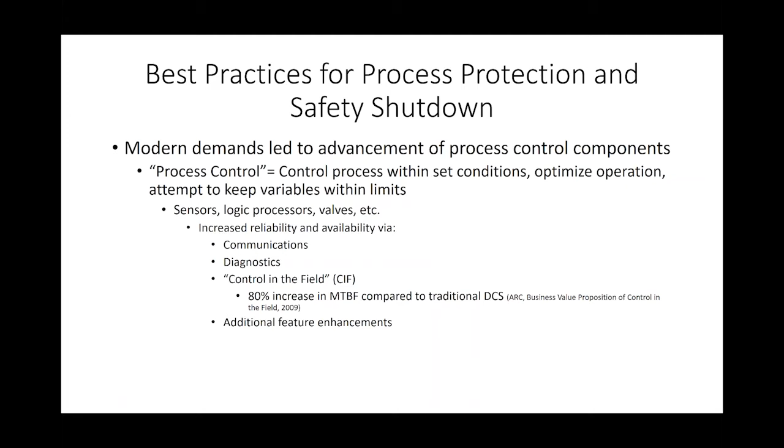But there is another area in your process, and we're going to see, has this incredible technological edge translated over to this area of the plant? It's easy to focus on the process and process control, as it's essentially your cash register. The product is what makes you money. But there is another part of that process, those limits I mentioned.

Process protection and safety shutdown is what I'll call it for the sake of today. And there's basically three areas in protection if you really boil it down. You've got alarms, you've got interlocks and permissives, and if all else fails, you've got your shutdown system. Advancement here has been somewhat limited, and there's a few reasons for this. One I mentioned, the cash register and the focus on process control.

But there's also the appearance or thought that protection systems are separate. It's peripheral. It's over there, not what you're concentrating on. Sometimes it actually is separate, like in the case of safety systems, where it's required to be separate. Speed is critical in this arena. If something goes off the rails, literally or figuratively, speed in responding to protect your assets is crucial.

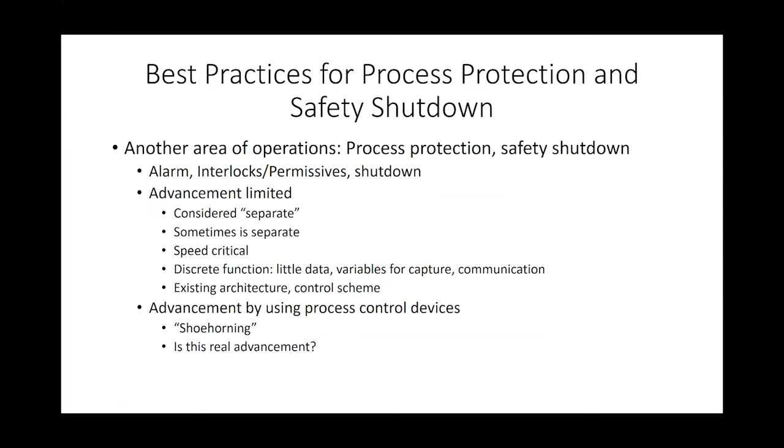Then there's maybe the biggest one of all, the existing architecture, the existing control scheme that you have, or that a process has, that calls for a discrete device to do the discrete function, been designed that way. The advancement in the area of protection has really been, up to this point, using those super smart process instruments in the protection systems, shoehorning them in, if you will. And we're going to take a look at that and see if that is really advancement. So let's take a look at these three areas and see what the demands are and if we could improve the performance of our process protection.

First up are alarms. A critical attribute for alarms is speed. Limits known, know what you can operate at. So the faster the response, the faster the reaction. That same ARC paper from 2009 found the most significant improvement in systems was the reduction of response time. That control in the field reduced response time, and that's where they saw their greatest gains.

Another attribute, which is opposed to the first one, is finding that alarms can happen too often or too quickly in some applications. So you've got some applications that need it fast. You've got others that can result in an alarm blizzard, is what I'll call it. And if you've ever been at an operator station when something goes amiss, the alarm windows pop up so quickly, and there's so many, it completely covers the HMI graphics, and you lose visibility on what's going on. It's an avalanche or a blizzard.

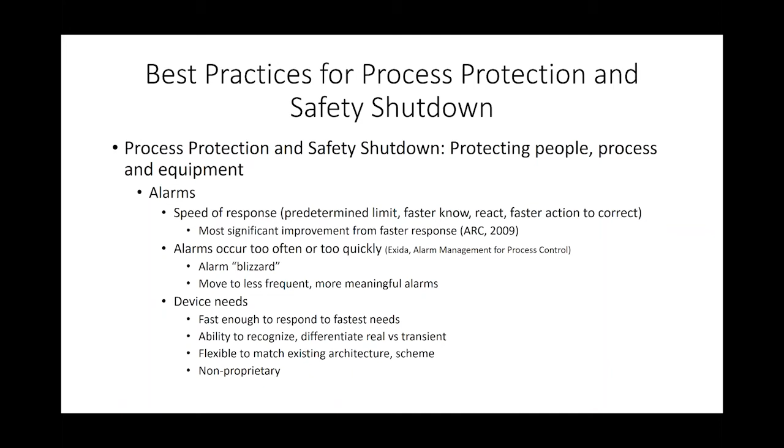So a truly advanced device would need to have the ability to do both, to react fast enough to meet the need of one area and have the ability to differentiate between a real or a transient condition for another. In addition, it should be flexible enough to match the existing architecture, because you don't want to redo the whole thing, and match the control scheme. As always, it should be non-proprietary, leaving the choice up to the customer, allowing it to work for anyone, anywhere.

So let's take a look and see the ways alarms have historically been handled. First off, let's use a mechanical switch doing the sensing. Discrete device matching the discrete logic required. It's either within or outside the limits. So here it's connected to a logic solver, a PLC. Back in the day, mechanical switches were hardwired, and some of those still even exist today, but they're pretty few and far between. So there's a match between instrument and logic, but the switch is not the most technologically advanced nor reliable instrument here.

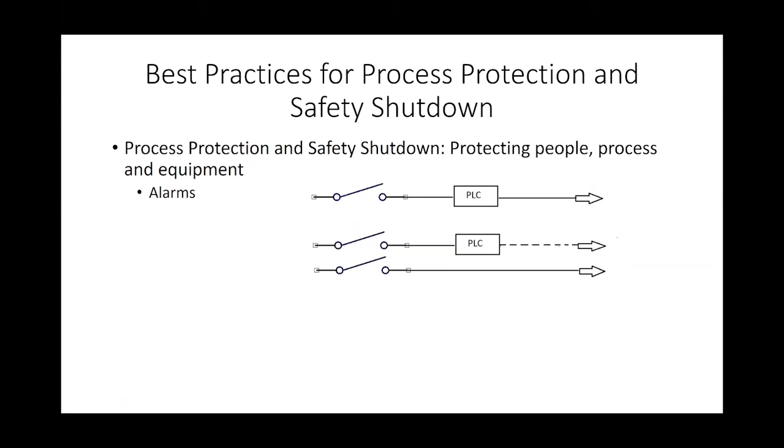So what have we moved to over time? There's a double pole switch where one signal goes to the logic solver and the other is hardwired, sort of a redundancy, hedging of bets, if you will. This is the quote unquote advancement in alarming. Not sure about that. So let's take a look somewhere else and see what we can move on to.

The process transmitter. All those terrific features of the process control instruments are just too good to pass up. We want to put them in here. We'll shoehorn it in. Sure, it's not a discrete device. It takes some time to process. It's pretty slow, and it doesn't match the existing architecture. But like the old Midas commercial used to say, guys with the big hammers will make it fit.

There is another option, a hybrid device, one that can either be an electronic drop-in replacement for a mechanical switch, requiring no external power, but having all the functionality of a smart process control instrument. So getting all those features that match the existing architecture, or it can be a transmitter switch combination, allowing it to fit whatever functionality you're looking for.

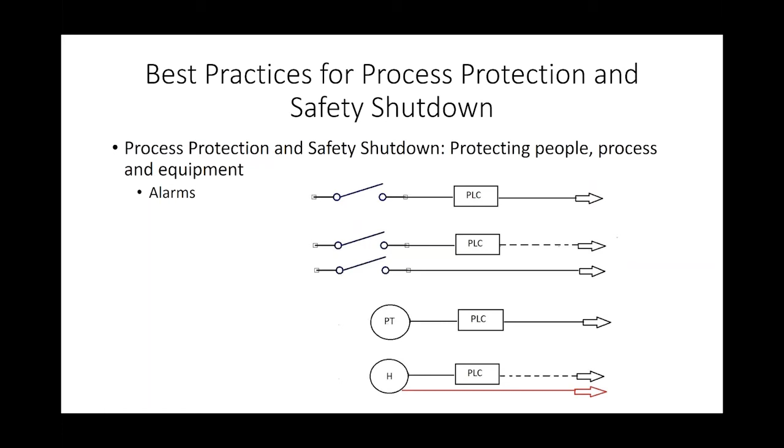This hybrid device, ideally, would have an extremely fast response time that could fit the fastest requirement, but should also have the programmability to allow it to determine if it's a real or transient condition to avoid that alarm blizzard or alarm avalanche. Put intelligence in the device in order to do that. That would be the grail on alarms.

Next up, interlocks and permissives. These are a little different from alarms. First, they're not as speed dependent. Reliability is key here because it is a go, no-go gate, if you will, for the advancement of the process. Like a downhill skier going through the gates, you have to hit a condition before you can go on to the next thing. Devices here need to correctly identify the current condition and be operational and accurate in reporting that state. So here, we really need the highest of reliability.

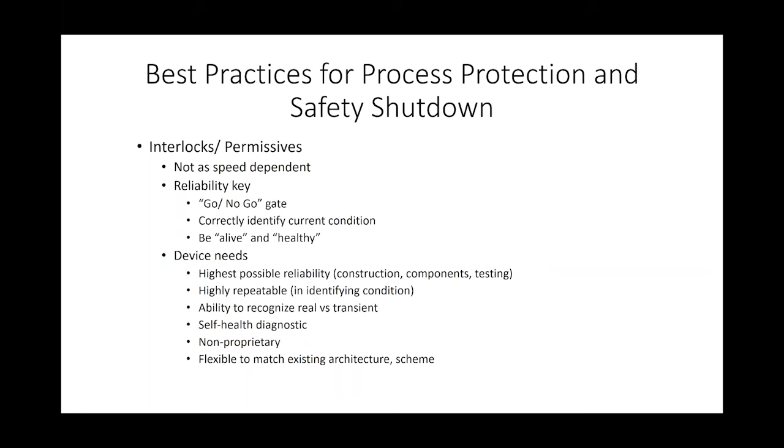We need it to be repeatable, to recognize that state over and over and over again. The ability to recognize between a real and transient condition is still good. Diagnostics are really a must to help out with the reliability. We need to know if it's alive and healthy. And the final two, of course, non-proprietary and flexible enough to match the existing architecture. So how do these look over time? Well, again, in the past, mechanical switches, and they're still being used. They're still doing their job.

In this case, it is connected to the PLC or the DCS, excuse me, as it's an integral part of the process. It's a gate. It's a condition that needs to be met to move on. So here's cutting edge circa 1962.

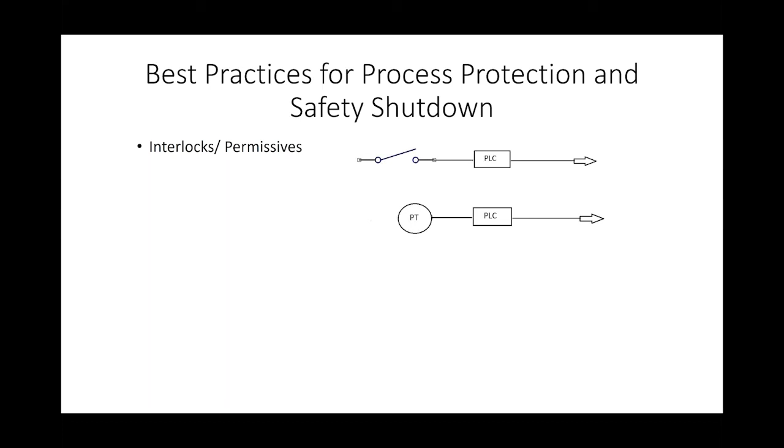Next up is the process transmitter. Again, features just way too tempting to pass up. Here, it's not as bad a fit as alarms, but it's still a little out of its element, still doing the discrete function, maybe or maybe not a fit into the existing scheme. Probably not, because a discrete function is designed around a discrete device. It's still certainly slow, but that isn't as critical here. The process transmitter is very, very reliable, and that is what we are looking for.

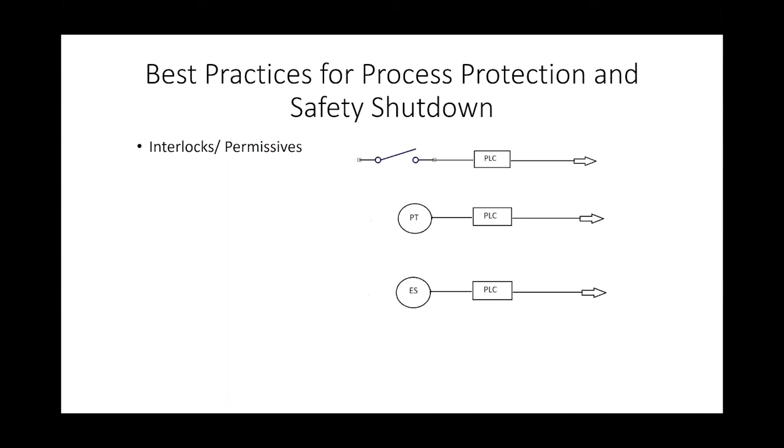So could there be something that would solve all of this? The third choice, or the third device that we're seeking here, would be an electronic switch. Something doing a discrete function with that reliability of the advanced electronics. So a combination of the intelligence and reliability of the transmitter, but fitting the architecture that exists or the discrete function that will always be there. Again, a discrete device doing a discrete function will always do better than an analog device attempting to do the discrete function. And we'll see that in our next area,

which is emergency shutdown systems, or ESDs. These can require extremely fast response times. Think gas turbines spinning at umpteen thousands of RPM. You're going to need to react quickly in order to catch anything before something bad happens. It is absolutely critical to correctly identify the condition. In this case, because you're the last line of defense, you're shutting down the whole process. You're tripping it.

False trips, spurious trips on an ESD are completely and totally unacceptable. It has to be reliable. Again, see above. If you're going to shut something down, it has to be reliable. It can't have a false, can't be Chicken Little. Can't scream the sky is falling. It has to be reliable.

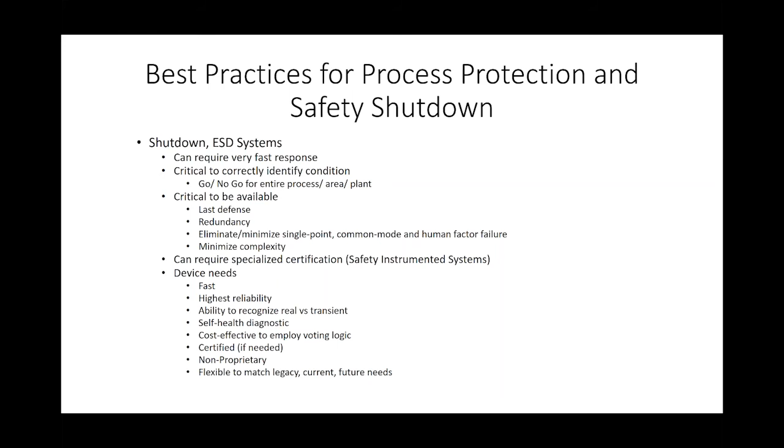They should be, and now, I mean, this list goes on and on. We're pushing our luck, yeah? They should be cost effective to allow for implementing redundancy in voting logic. And if needed, they should have that required certification. Of course, non-proprietary and flexible enough here to match not only the legacy system that's in place now, not even the current system that you're looking to achieve, but even future needs. With the focus on safety, there's a lot of regulations and they always seem to be changing. So to have something that can provide some flexibility to match whatever you could imagine on the horizon would be good.

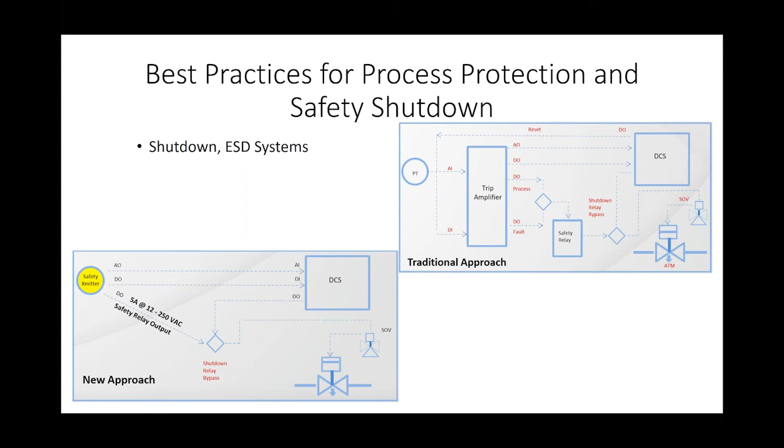So a more advanced approach or a new approach would be something like a hybrid device again. Still feeding that DCS, but having the instrument itself and the DCS capable of communicating directly to that relay. Kind of built-in voting logic, if you would, and on from there to the valve. So an elimination of the trip amplifier completely, and a lot of the associated wiring and communication can be greatly simplified, and a true technological improvement rather than the shoehorning of the technology that we recognize as being nice into an application that it's really not made for.

So in conclusion here, the technology advancements that have increased productivity and reliability of process control haven't had the same impact on process protection. What little has been achieved has been by, frankly, misapplying those advanced process instruments into the field of protection. It looks good, it sounds good, but when you look at what it's doing, it's a misapplication.

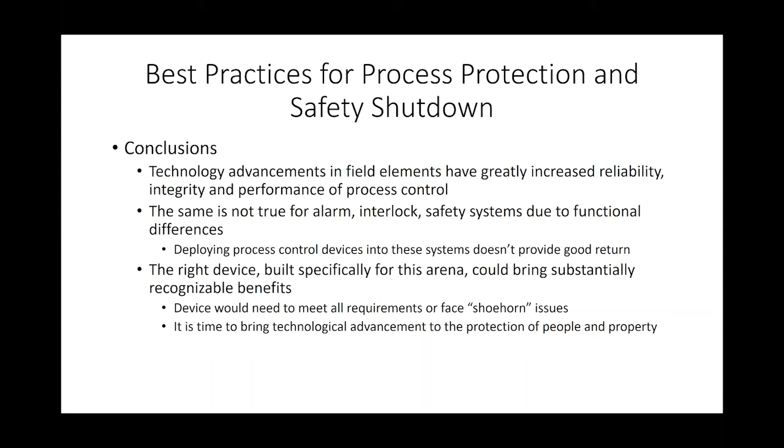The right device built for this area of protection and safety could have just as large an effect in the area of safety as the process control instruments have had on the process side. To avoid that dreaded shoehorn issue, the right device really should meet all of the requirements. If it only has some, then you run into that problem of making something fit because it's the best you have rather than everything you want. It's time to bring the technological advancement to the protection side, the protection of people, processes, and property.

So the takeaway, the recommendation here would be to seek out a device, an instrument, meeting all the requirements that we've gone through here: fast, reliable, intelligent, can think. It's actually got intelligence in the device, just like the process control ones. It can recognize a transient versus a real condition.

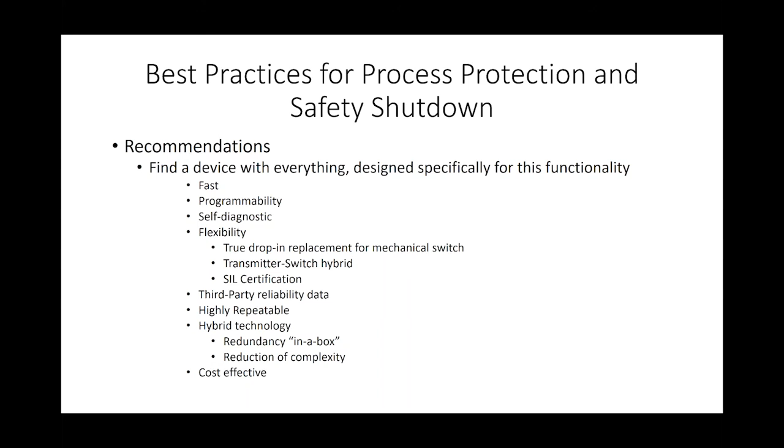Diagnostic, flexible. It should be a true drop-in replacement for old discrete mechanical switches without any wiring or control scheme changes, and or, depending on your current control scheme, a transmitter switch hybrid. But no matter what it is, it has to be what you want it to do. It should also be certified, repeatable, cost-effective, and of course, non-proprietary.

So that is what I have for today, and I would like to open it up to questions that you may have on today's presentation.

Bruce, thank you very much. I don't have any questions that have come in yet at this point, so we'll start to wrap it up and hope that some questions do come in as we proceed. I'm going to take over the presentation here real quick, Bruce. Sure. I got something in the way here. Can you see my screen now? I can, yes. Okay, there we go. So we'll continue to wrap it up here, and I'll see if any questions come in.